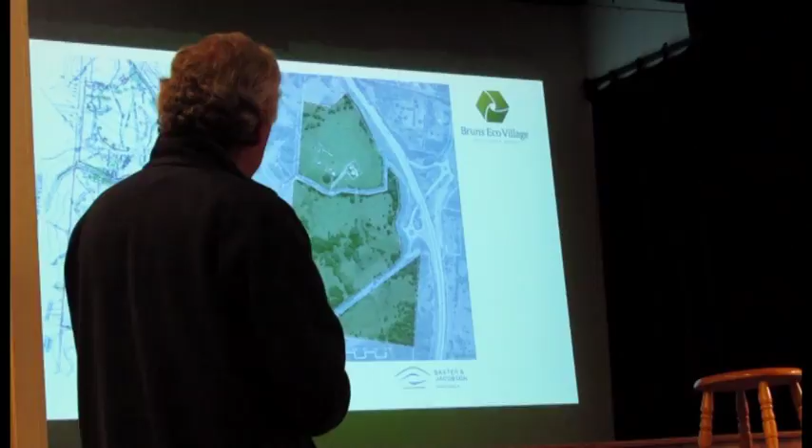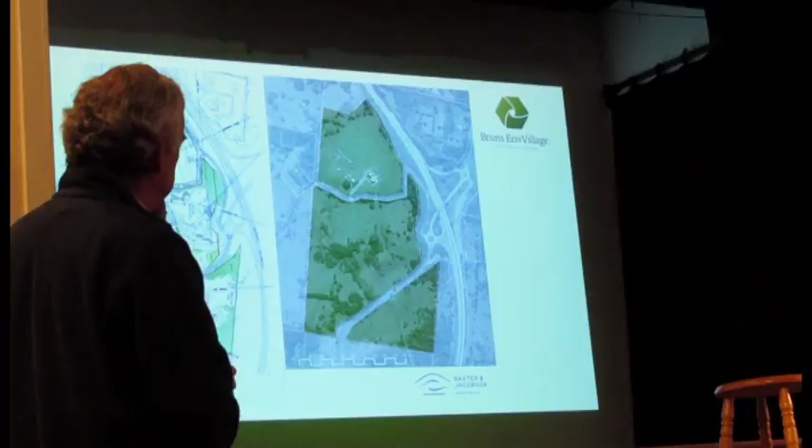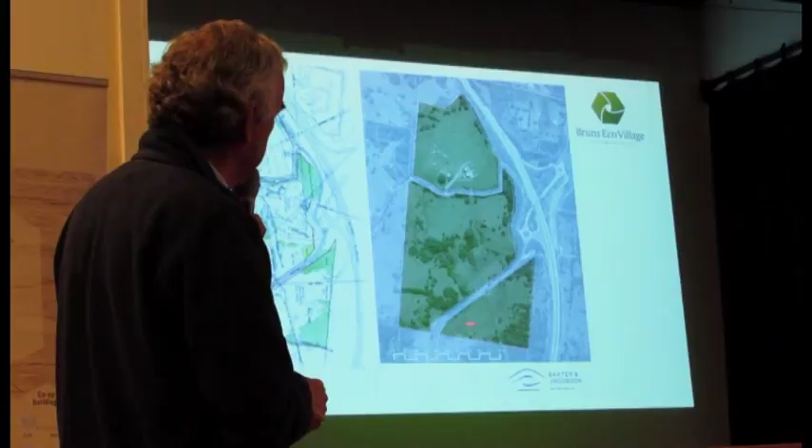The highest point, in fact, is just off the site, and it comes down to the fig tree. Kelvin's house is there. From here, we look north, northeast, with magnificent views of the ocean and beautiful solar access. This is an area we'll talk about in more detail. On the south side of Saddle Road, there are larger, flatter areas, before we come to a very steep escarpment that wraps around here, which is more heavily forested, with some very interesting and intricate waterways running through the site. We've got a spring located here. You can see the elements of water merging here as they wrap down the site, becoming a very flat area that Kelvin has spoken about, with Gulligan Lane or road cutting through it.

It's a magnificent area. Now, interestingly, with this part of the site, there's almost a polar opposite to the saddle and the tree, and it's down here. This is the most beautiful, protected amphitheatre—a little bit smaller, but flat, surrounded by trees, and ideal for communities to gather and meet as well. So you have a focal point at the high point, and the potential for gathering down here with this large cleared, sloping area looking to the northeast.

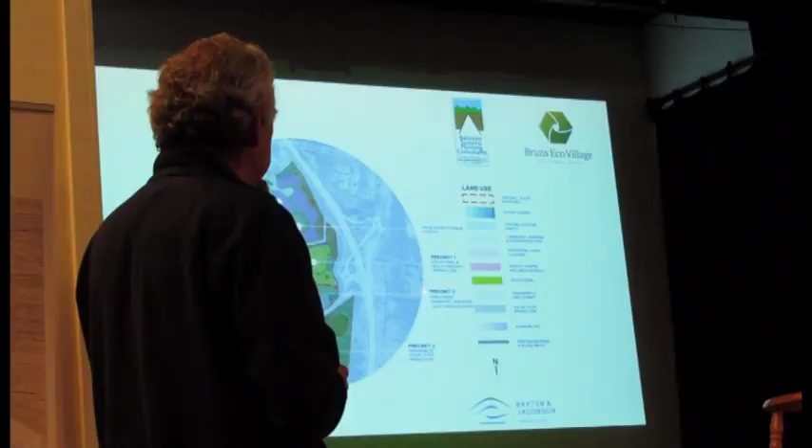Then we come to the south side. The school, the educational use requires significant flat land. And more and more so, flat land is important for educational purposes. We have to provide accessibility to all facilities there now. So essentially, that is a perfect site for the school.

The wellness area that's connected to the school, just here, can be connected to these waterways, which we want to enhance. As Shane mentioned, we want to enhance the existing waterways, we want to enhance all the natural vegetation. So you can see the darker green has all been hatched out and strengthened and enlarged so that the residential precincts tuck in around there.

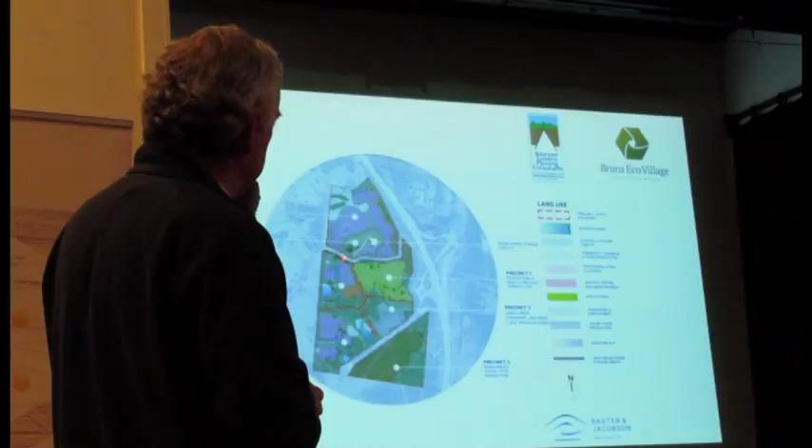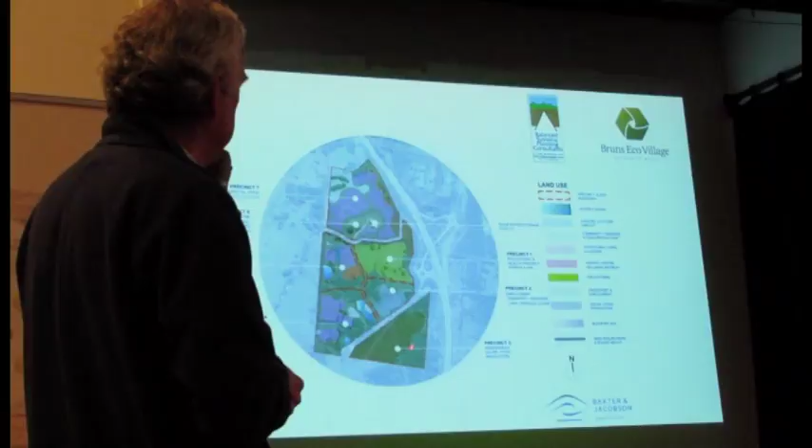So there'll be more residents here, and then higher down here also, more facing east, some beautiful areas for the residential area. Then we come down to this area, it's low lying. There are small portions of it which are flood prone, which we've set aside, but essentially this is ideal for the work-life relationship that Kelvin spoke about.

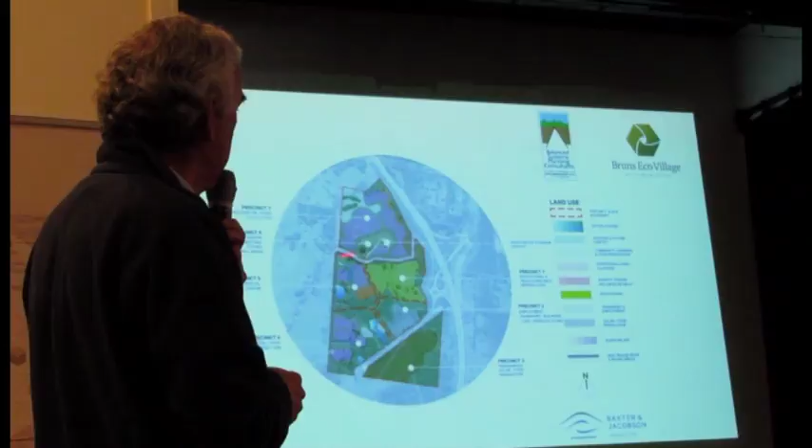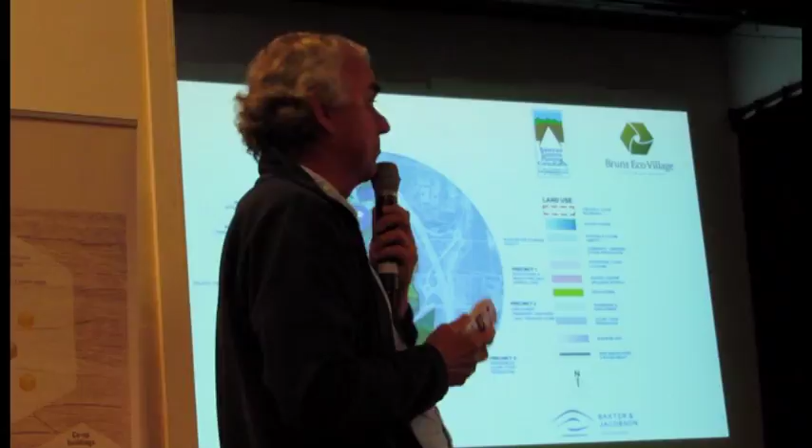You can just see here indicated we are looking at the possibility of reorganising Saddle Road so we can better service the residential areas, but also we want to take the road and the traffic pressures off Saddle Road as a totality and say that we are essentially self-contained. We're not going to significantly increase the traffic load on Saddle Road.

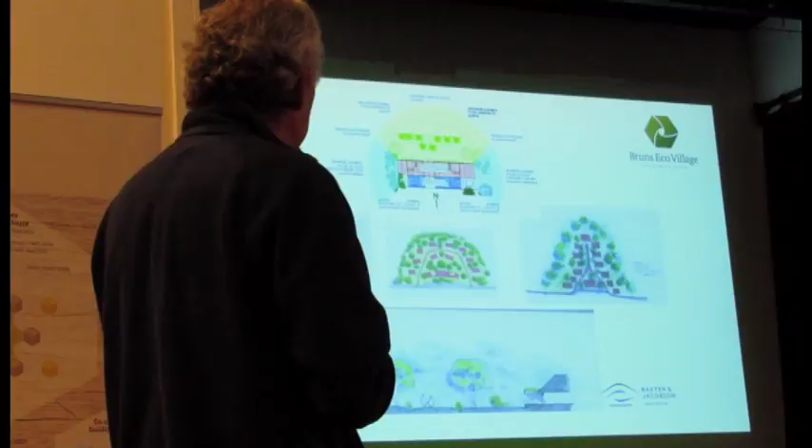We've just had a very preliminary look at how clusters will work there, because the landform is different, it's got different orientations, different contours. Where will the cars stop? Where will the road be? Will this be pedestrianised? Will it allow emergency vehicles in? Will you be able to drive to your garage?

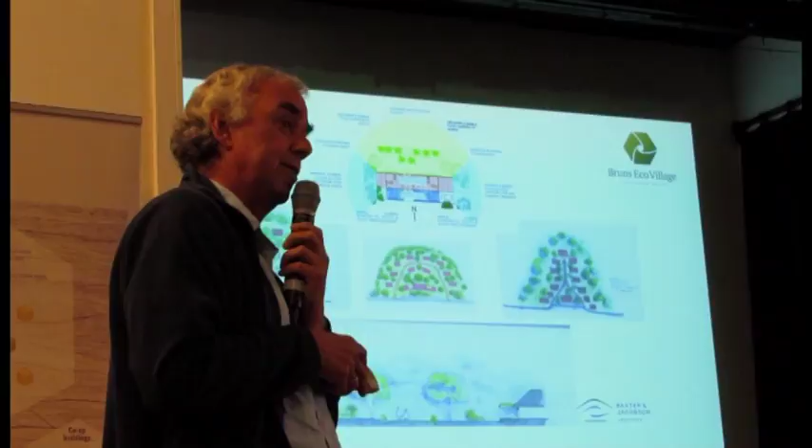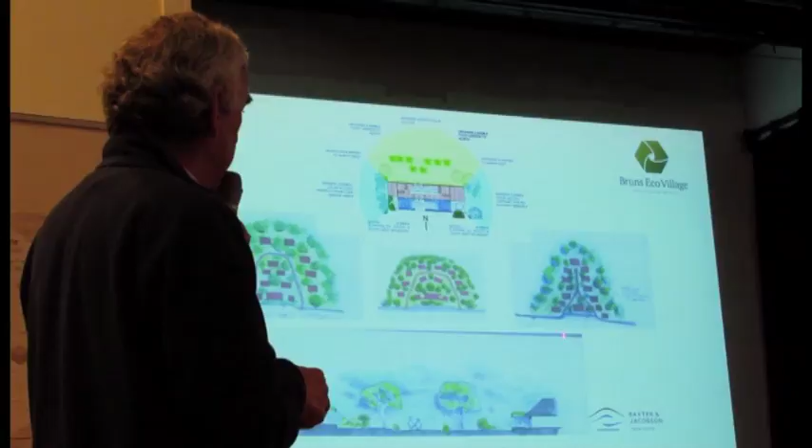These are all things that this development program you're about to embark on will explore. But we have looked at it in terms of some will be more circular, some will be more linear depending on the contours. The relationship of a built form to the solar aspect is being looked at.

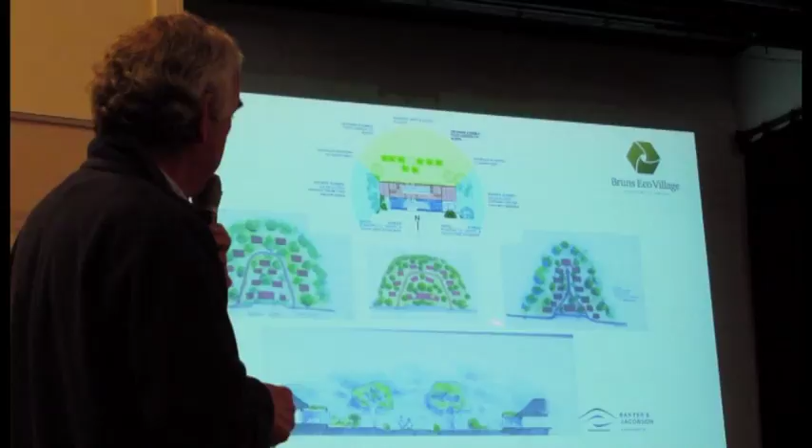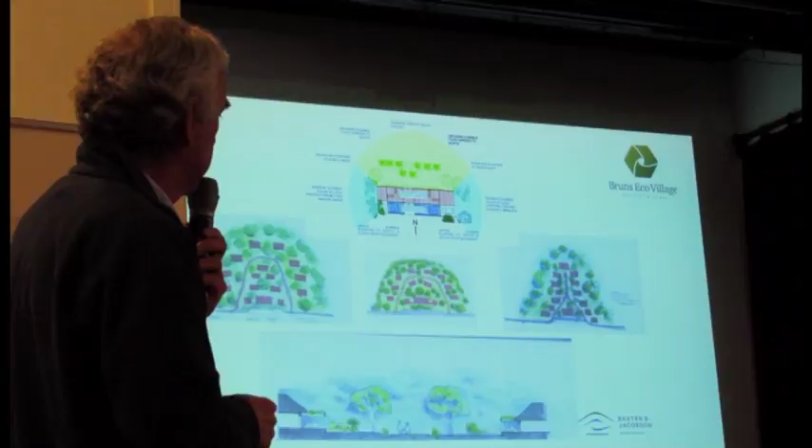Where will the common house be? Here, or here, or here? And how will we control the privacy from the individual through to the public street and the shared space with vehicles and cars and people? So that just gives you an idea of where that is at, but it's not a design, it is just exploring those options so we know the land is suitable.

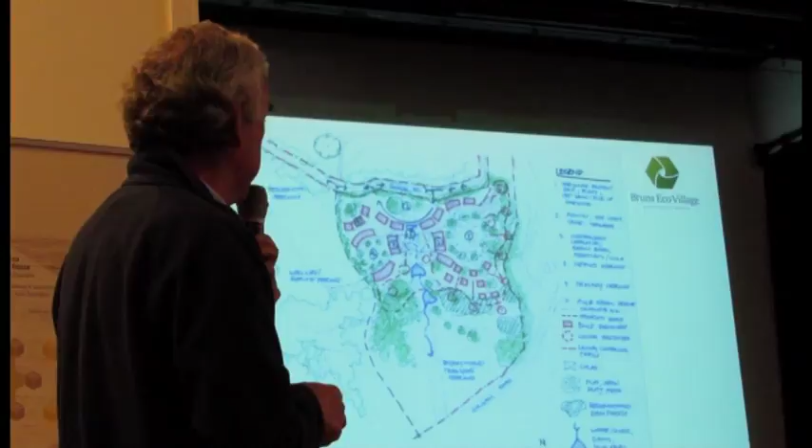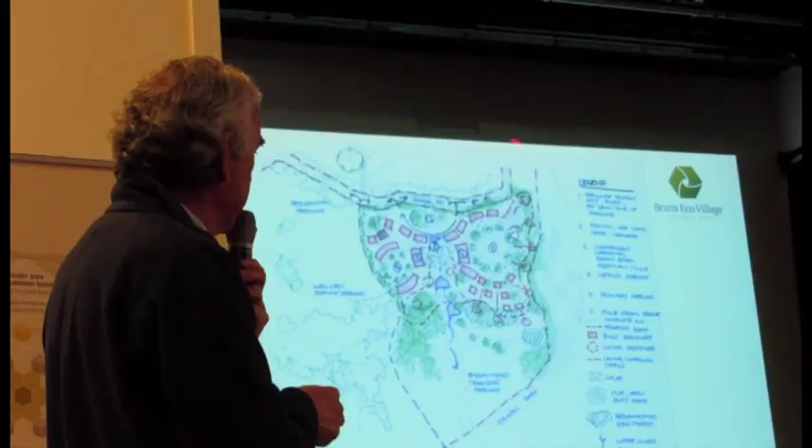And finally, we've just looked briefly at the educational side. How can a community school work there? How can it fit on the land? How can we generate and bring the community buildings together? Can we introduce the water element and so forth, so that we know that when this becomes developed, it will work beautifully on that site.

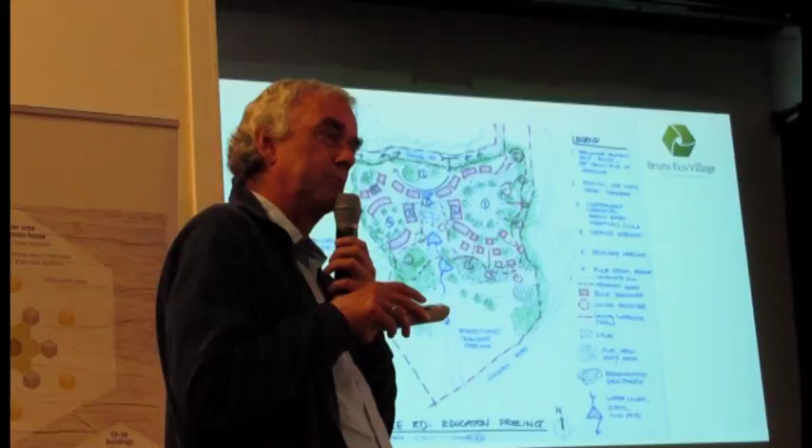So I hope that just gives you a picture of where we are, where we're up to, and what the issues are that you'll all be now involved with in the future.